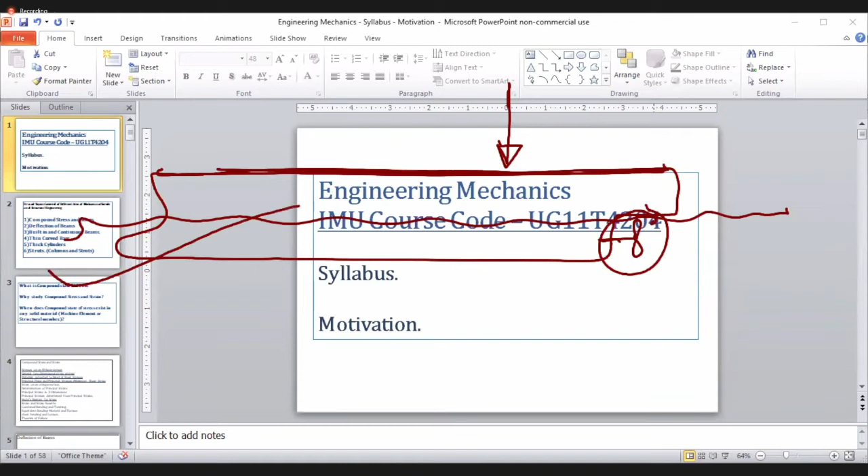And if anything goes wrong over here with the machines, if it is not moving at the right speed, or it is subjected to some kind of rogue waves, then it is your guts, your courage and your knowledge only that will help you in taking action.

Yes, in some very bad situation, maybe a helicopter can come and pick all of you up when the ship is not controllable, or maybe you can jump with a lifeboat and run away. But that rarely happens. Every time, a marine engineer is dealing with a situation which no other engineer on land is experiencing.

Right? Ultimately, ship is moving under the influence of what? We know very well that the ship is acted upon by the force of buoyancy. Then the ship has, suppose, its CG over here, and it has its weight acting over here.

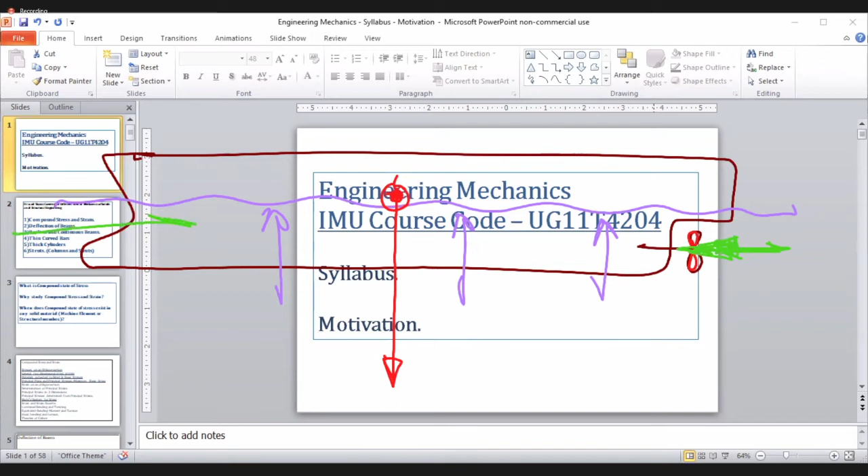This propeller, what does it do, my dear friends? This propeller is pushing the water, and the water in turn is pushing the ship ahead. There is resistance of the water coming from the side. Then there are forces of wind and forces of current also acting upon it.

Then there are forces of waves. What can happen? A wave comes like this. So over here, the ship is under the water for a large extent. Here it is not so. So here there is high buoyancy, and here there is less buoyancy.

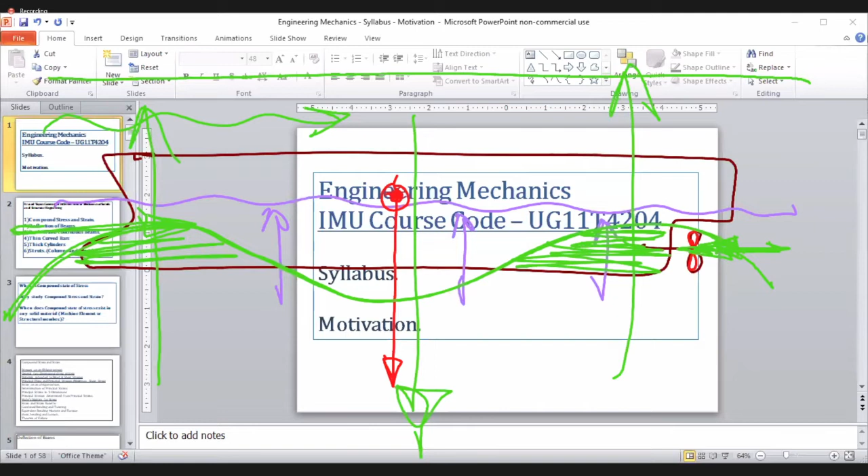Correct? And we are all keeping the ship stable by controlling the influence of all these forces. So how to add the forces? What can be the effect of a force? That anybody should know beyond any doubt, right?

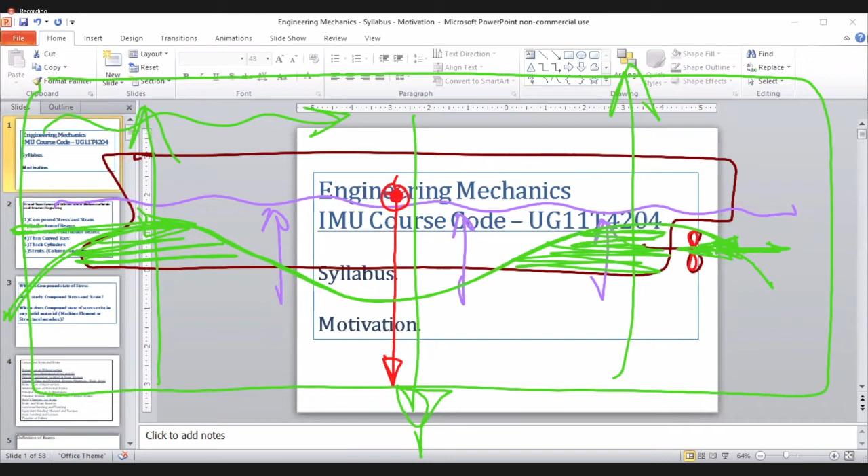This is the job of probably every engineer dealing with machines, be it marine or mechanical, but marine engineers are in a special condition as I explained to you. You will come across a lot of machines in your life.

Excuse me sir, we can't see the picture you are showing. Yes sir, okay, I got it, I will come back here again. Thanks for telling me. Can you see it now? Yes sir. Good, so now you know.

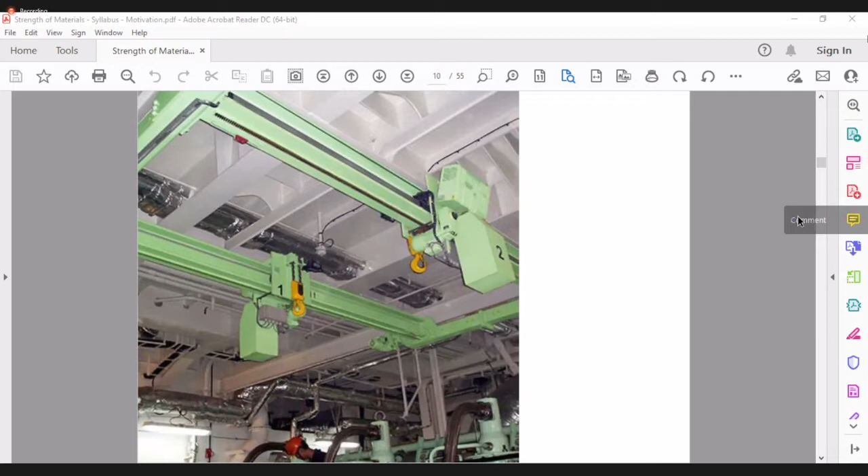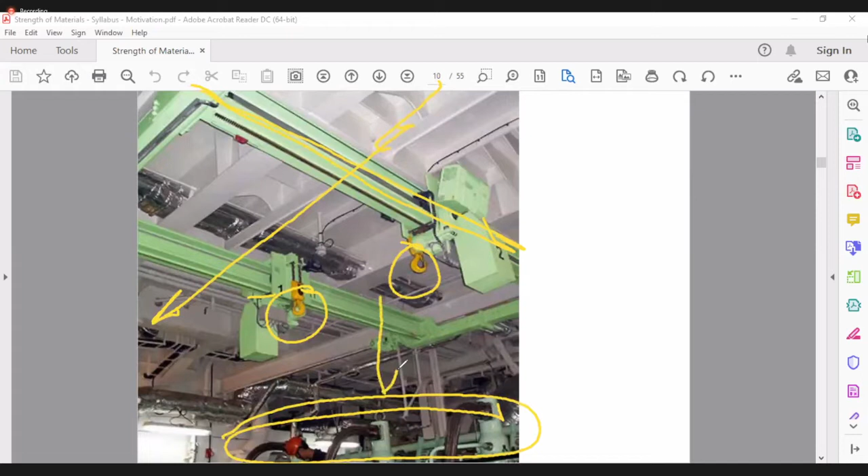This is the top of an engine, which we will see closely later on. And on top of it there are these long slender beams on which you can notice some hooks here. These hooks are required to lift the pistons out. You must have seen the piston of your motorcycle sometimes, if you spend time in the garage.

But here the piston itself weighs about 700 to 1,000 kilograms. A piston can be as tall as you and me. It can have a diameter of about 900 mm to 1 meter. And if it is a hollow cylinder, probably 4 persons like you and me can stand inside. It is such a big cylinder.

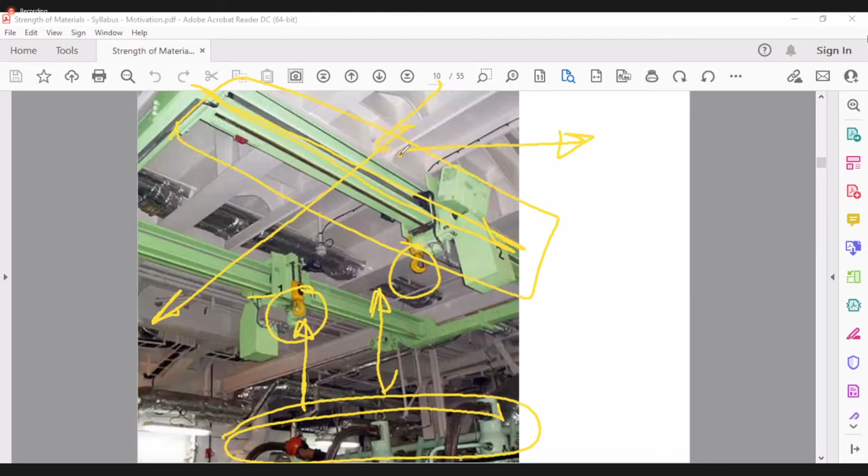So how to remove it? Now, if such a beam is to be operated, then it must be certified what the safe working load is - 3000 kilograms or 300 kilograms. As the case may be, it can be anything.

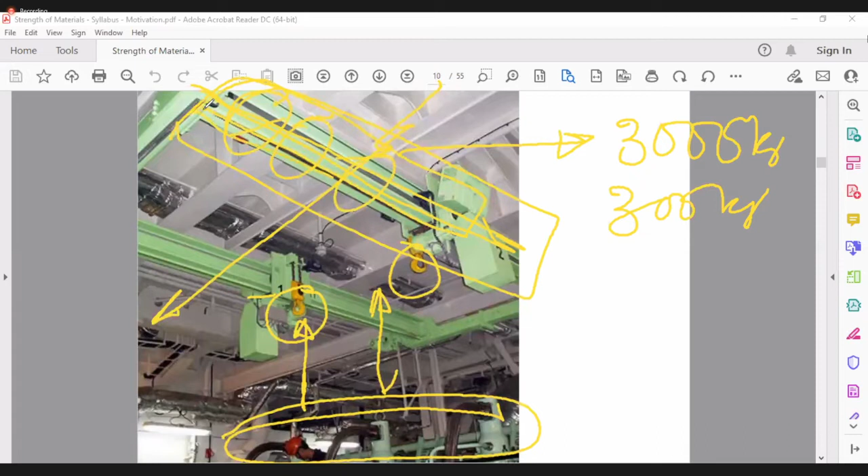So who will decide? How can we calculate such things? How can we select a beam? How strong should this beam be? Or by chance, it's written on the beam that the safe working load is 400, and you want to lift 500 - how will you reinforce it? Such decisions are to be taken. So for that, we should know how to add the forces.

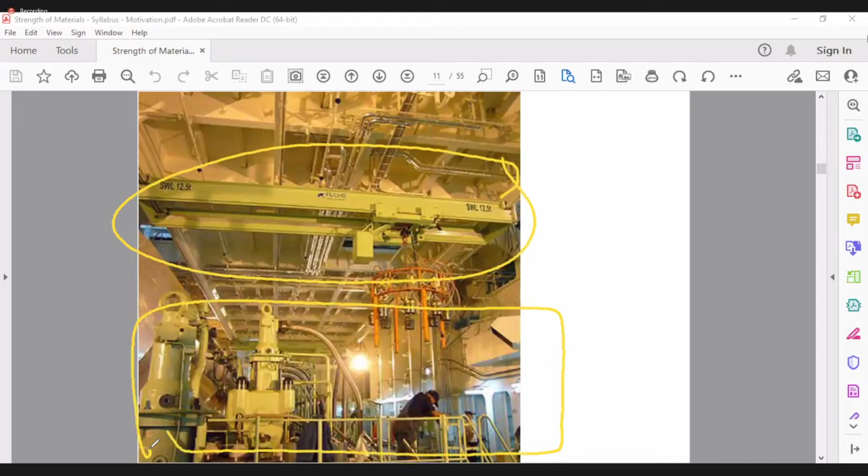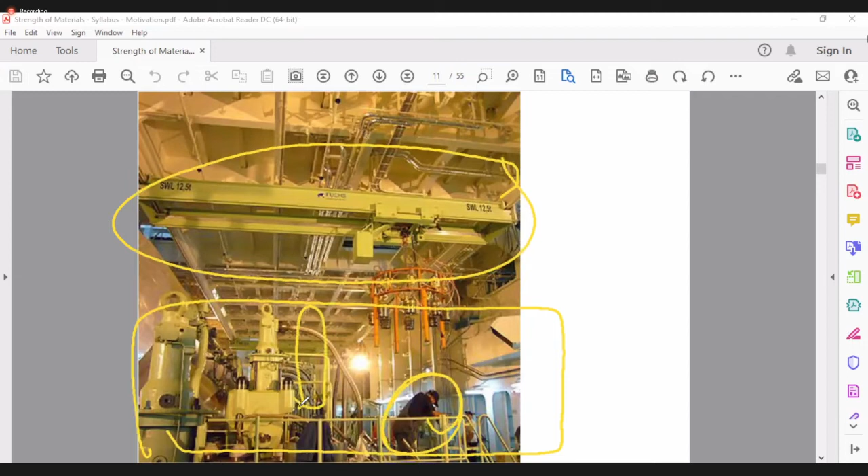Now, again, a quick picture. I don't want to tell you anything further, but here you can see a crane that I was showing you, and this is a gigantic engine. You can see a man standing over here, an engineer. So you have an idea that even the head of the piston is about 5 or 6 feet.

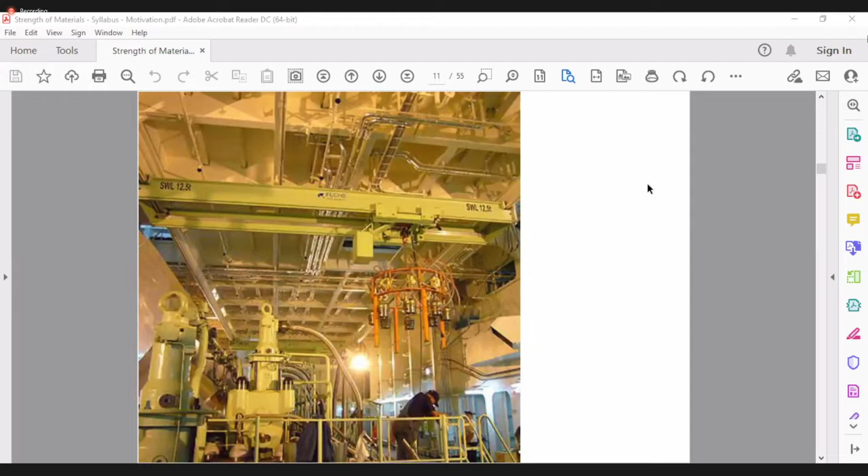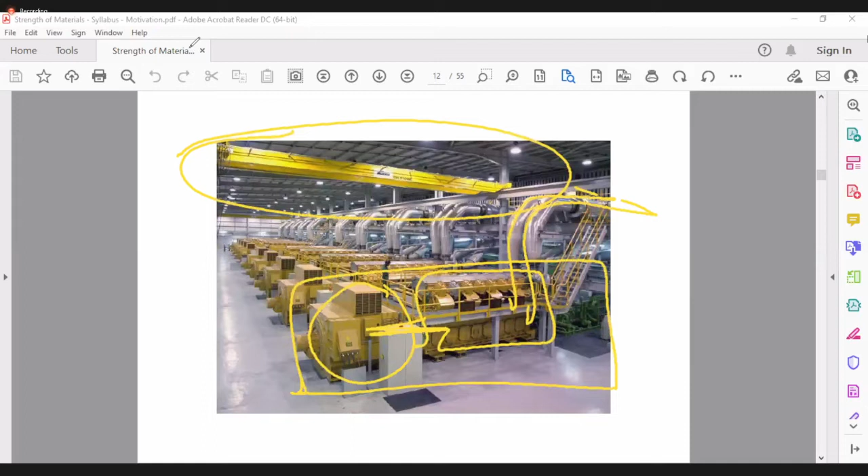On the ship also you will find a DG set looking like this, and to maintain that there is a crane. What kind of a crane should it be, how much should it deflect, what is the dangerous level of its deflection when it lifts the load? All these things are decided with the help of engineering mechanics.

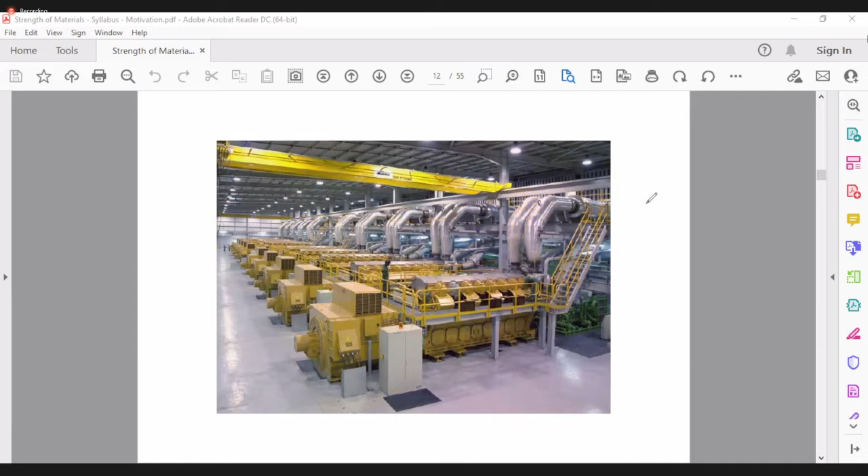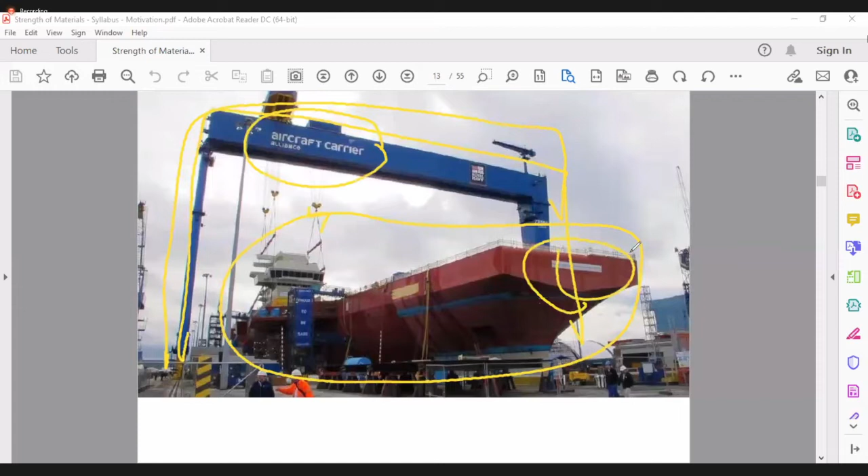This is an aircraft carrier. To build an aircraft carrier, this crane has been made over here. So how strong a crane should be, how strong this beam should be, so that the heaviest plate or heaviest segment of the aircraft carrier can be lifted and put together and welded together. You will be a Lloyd certified welder by the time you leave this institute. It is an achievement, let me tell you.

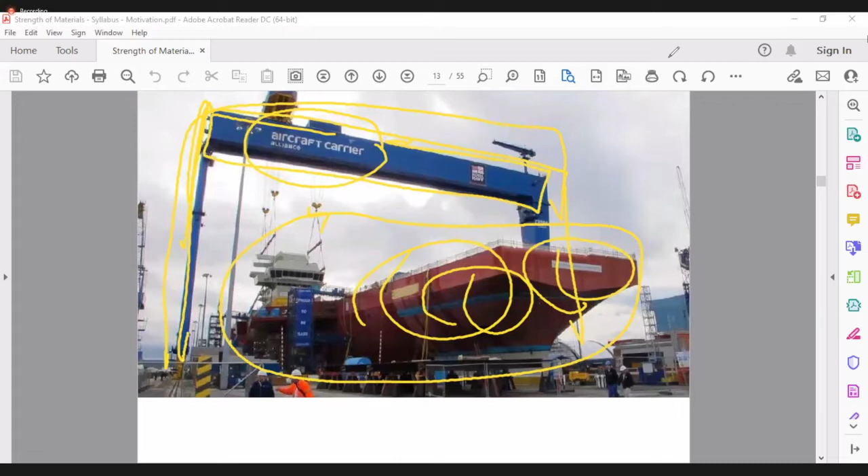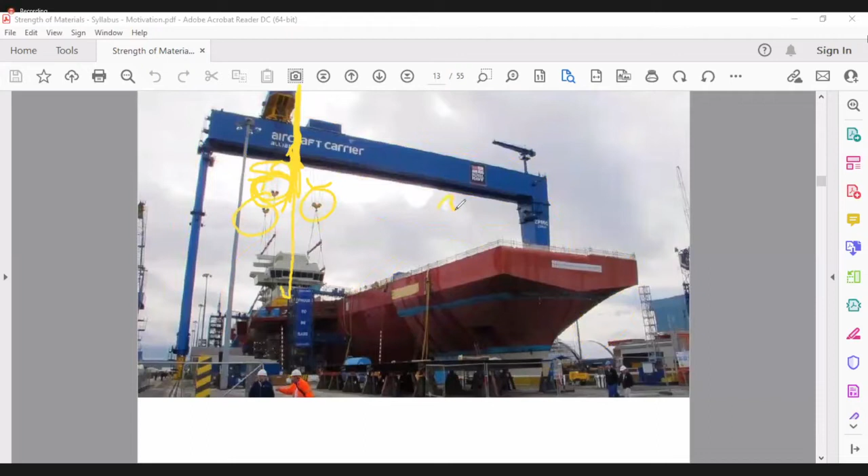You are noticing the 1, 2, 3 kind of hooks. Now all the hooks are nearby, and if you try to lift something, then at one place there can be a very heavy load. So to keep it safe, maybe some hooks should be here, some hooks should be there, so that the load is distributed. All these common sense things in engineering mechanics will become your engineering common sense after some time. You study over here and then you be on the ship for some time, and it will always be in the back of your mind what to do and what not to do.

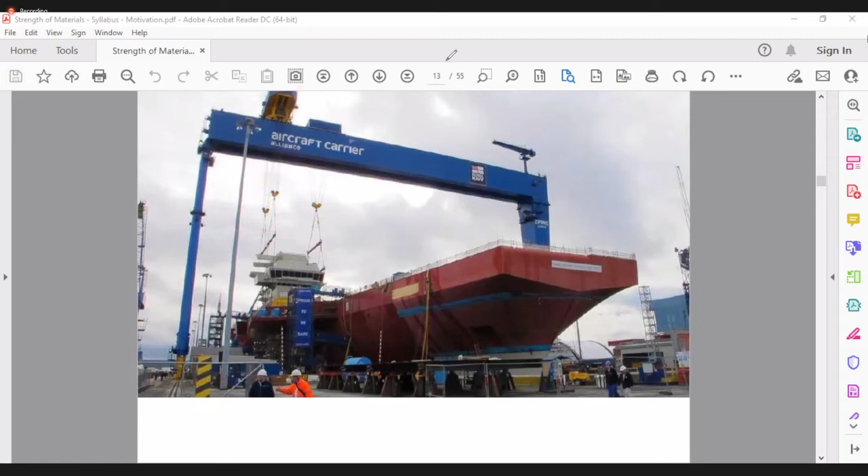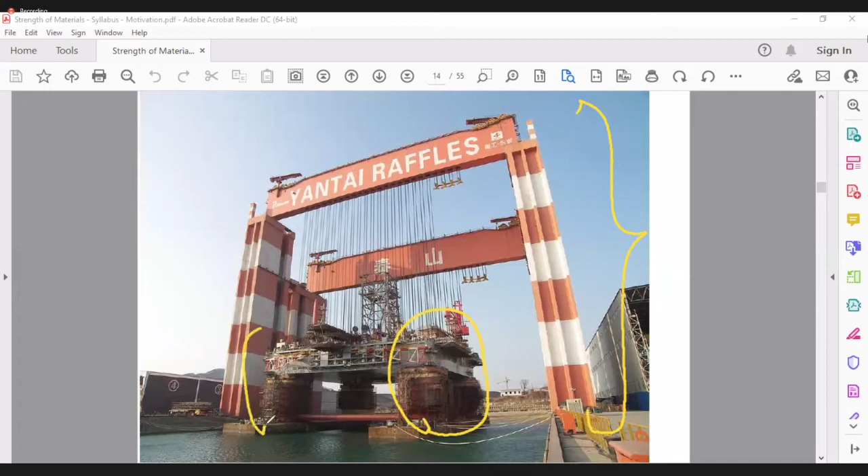And look at the number of ropes. How many of them are required to lift it? Now, the total weight of this rig is known. How many ropes are required? How will you decide? You will decide it using your knowledge of engineering mechanics. Just see the glory of this subject.

You will be applying your knowledge of advanced mathematics, engineering mechanics. Then you will study about materials, which are the strong materials. You will study two courses, one of strength of materials, one of solid mechanics, and two courses of naval architecture, that is how strong the ship should be, and you have one special course on engineering design. Engineering design will tell you what should be the cross section of this column, what should be the height of this particular beam, etc.

So here we are beginning in this course to study everything. I mean, you begin with engineering mechanics, study solid mechanics, study strength of materials, study naval architecture, study system design, engineering system design, marine system design, and then at the end of your 6th semester, you will have a great amount of knowledge. This is just a beginning. It is something like we started studying limits, then differentiation, then integration, the application of differentiation, the application of integration, so we know why it is useful. And now in many courses you are studying thermodynamics also, maybe differentiating things day in and day out, right? So you understood the application of calculus.

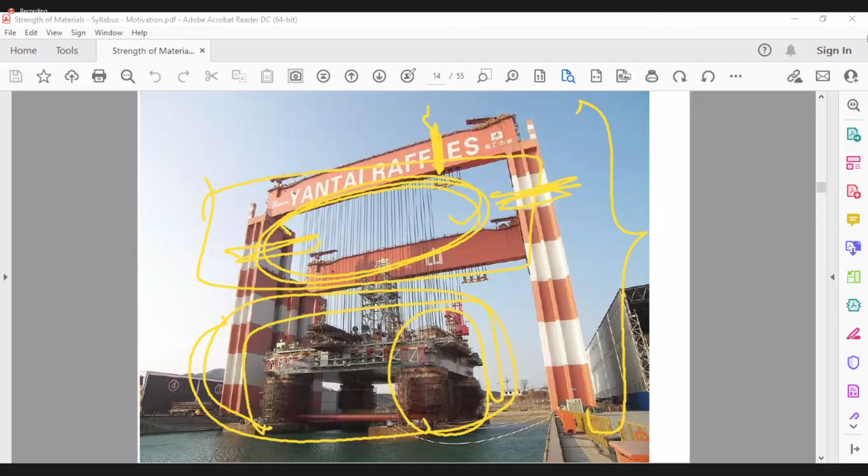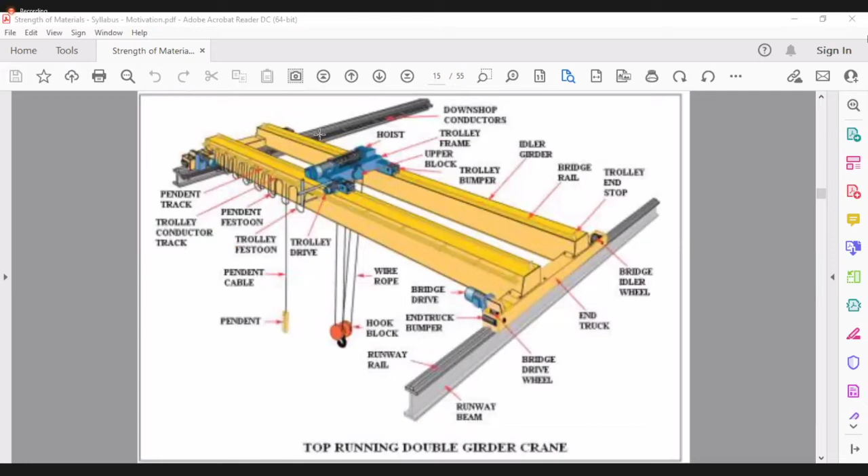This is a very simple slide. Every machine part has a name, and you will have knowledge of designing every part - which part is taking how much load and how strong it should be. You will be learning this eventually.

There was a proverb or saying that money makes the world go round. Today it is an agreed proverb that it is a container that makes the world go round. Container shipping is probably the most busy sector of shipping.

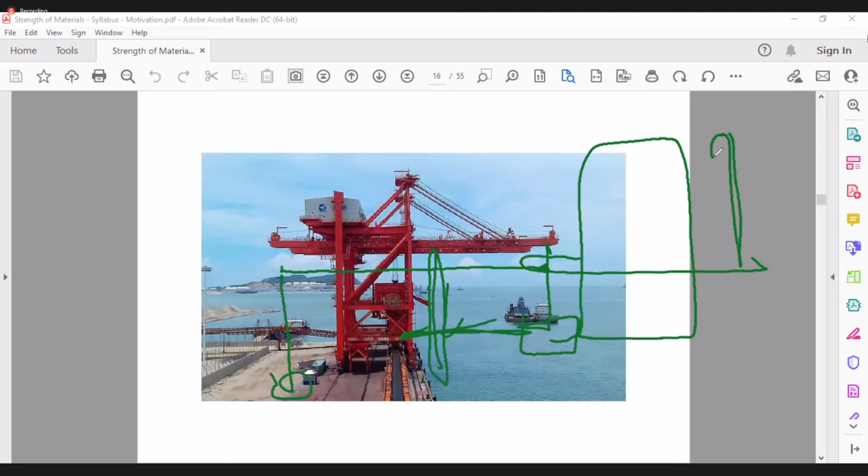This is as high as about the ship outside the water. Container ships are tall - from the water line, they are tall up to about an 8-story building. As a result, this crane should be about 25 meters high.

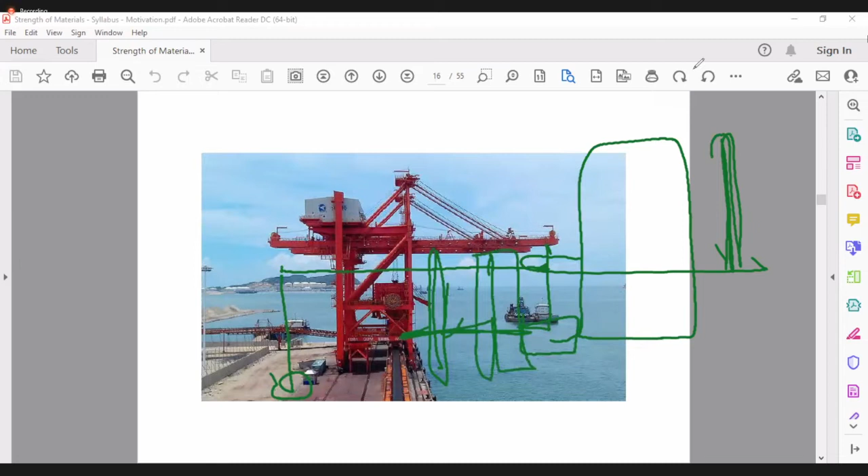When it lifts a 20-ton container from here, how much will this bend? How much does it move as it is taken back? How much pull will be required? What will be the tensions in these ropes? What will be the loads on this carrying column? All these things are decided by the knowledge of engineering mechanics that we will study.

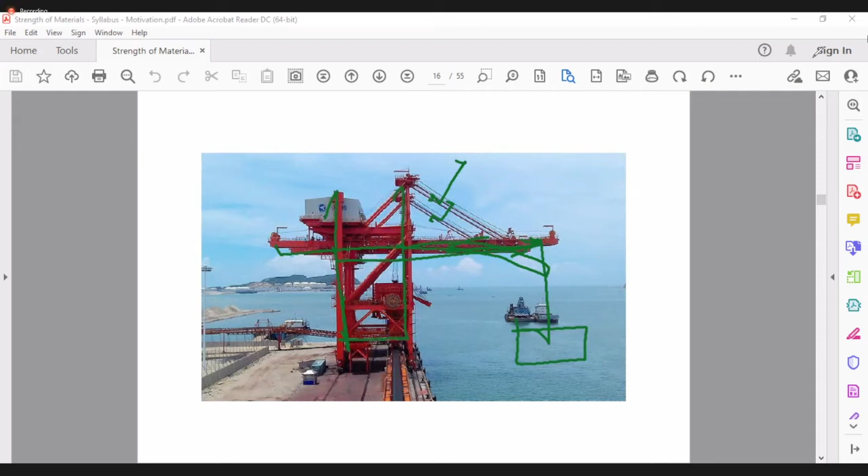So far in 11th standard, 12th standard, and in the last semester, we have studied vectors. We know force is a vector. We know how to add vectors by the IJK method, by the law of parallelogram, etc. That's fine, but how to make use of it in a practical marine engineer's life? This will be taught to you in this semester.

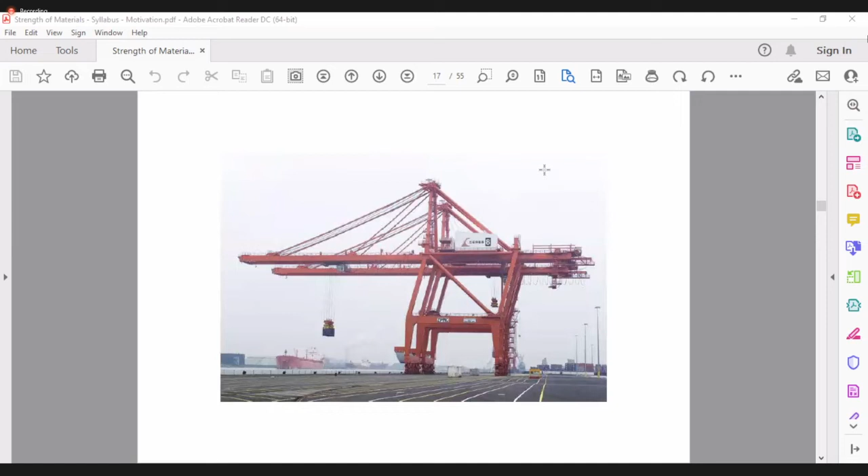Now, this is another crane. This is just a slide to make you conversant with it, well versed with it. It's a different design, that is all.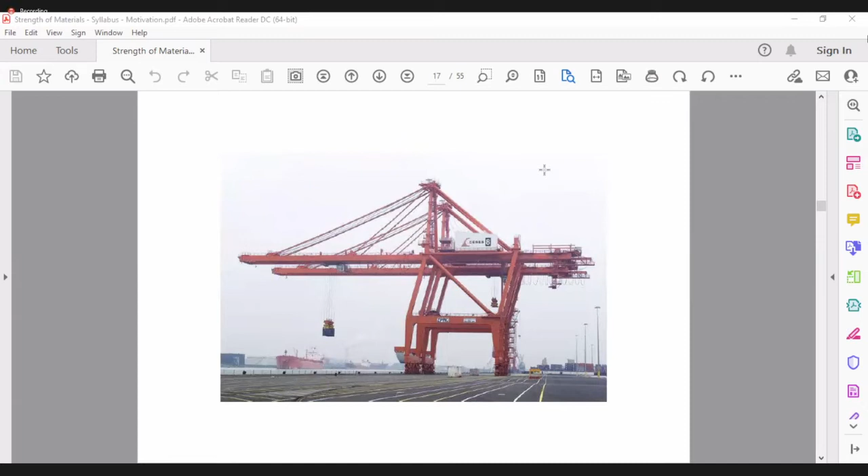Now look at the huge size of a container. This is a container, 40 feet long. This is about 10 feet by 10 feet. It may weigh anywhere between 3-4 to about 20 tons. Look at the pulley blocks, how it is lifted, and maybe it is being pulled out from the ship.

Internet may create some problem, but let us not worry about that. Let us keep working. My internet connection is unstable, it says.

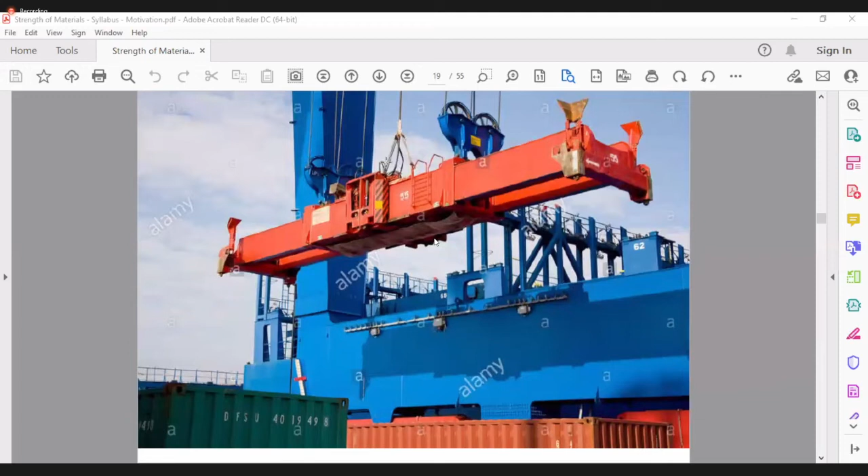Yes, this is a close-up of a thing called a spreader, which is lifting the container.

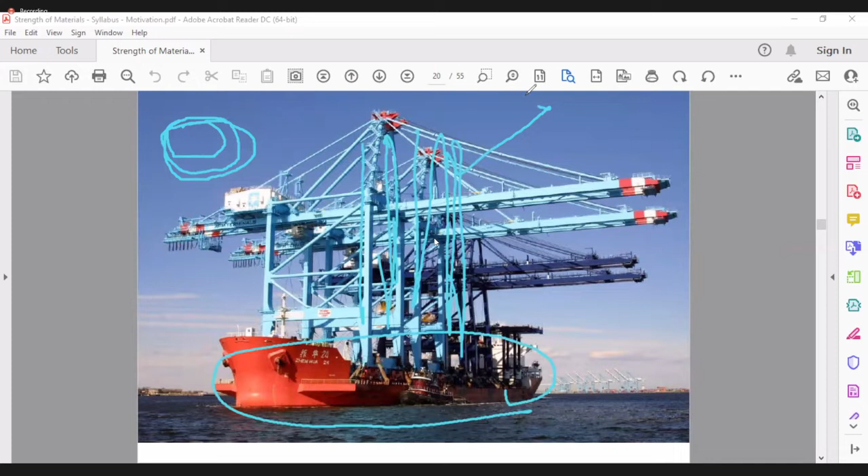These decisions are taken by carefully adding the forces only. So addition of forces is very easy - law of parallelogram of forces, or maybe a vector method using IJK, it is absolutely all right. But this is how you will put it into practice in your life.

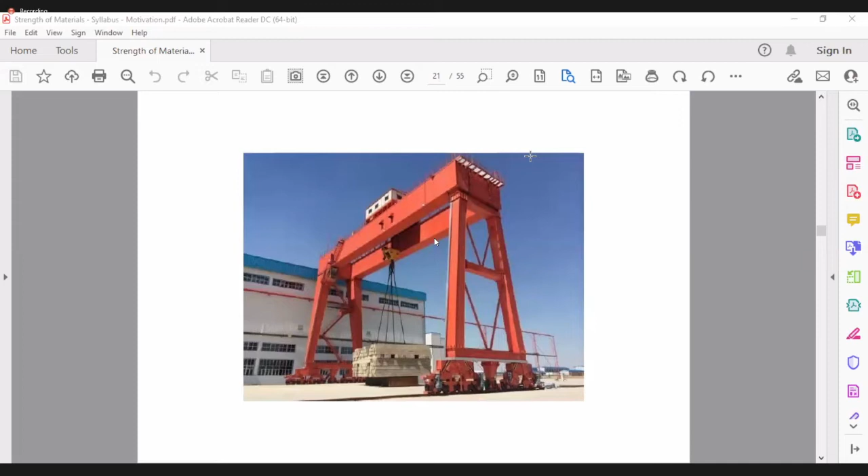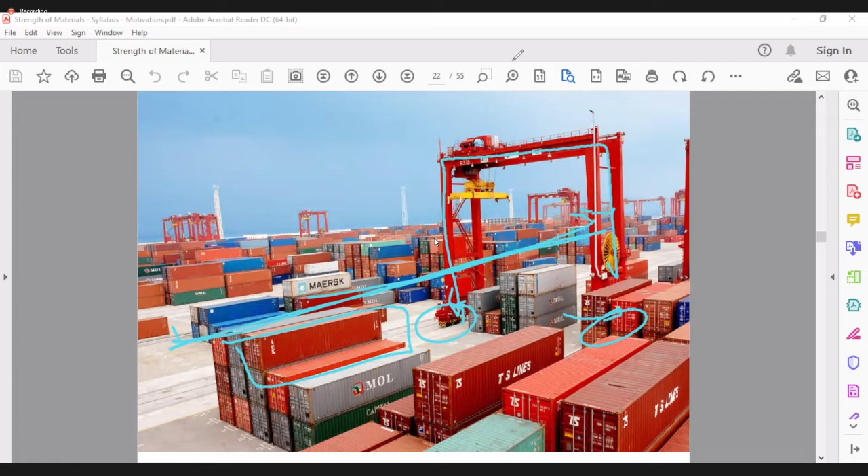Here I am showing this particular thing to you so that you can have a clear idea. Look, this is a container crane, container on a truck. Look at this height. The operator will be sitting somewhere over here, and on the entire port, containers are moved so that they can be pushed to their destination.

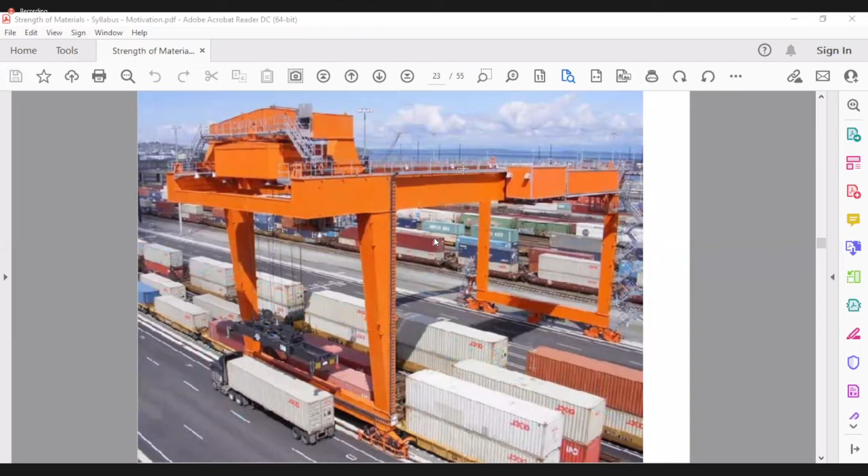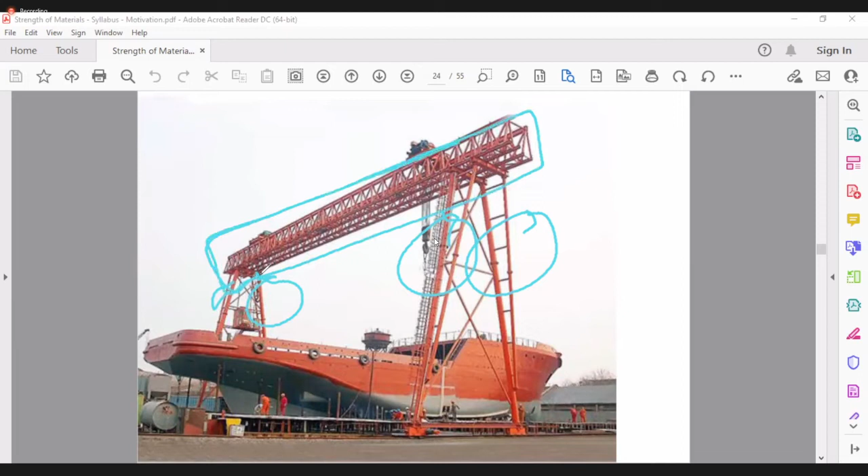Just see, it can lift an entire ship. It's a huge crane. To design the cranes, how strong this leg should be, how this total frame... see, this frame, this total part, it is a truss.

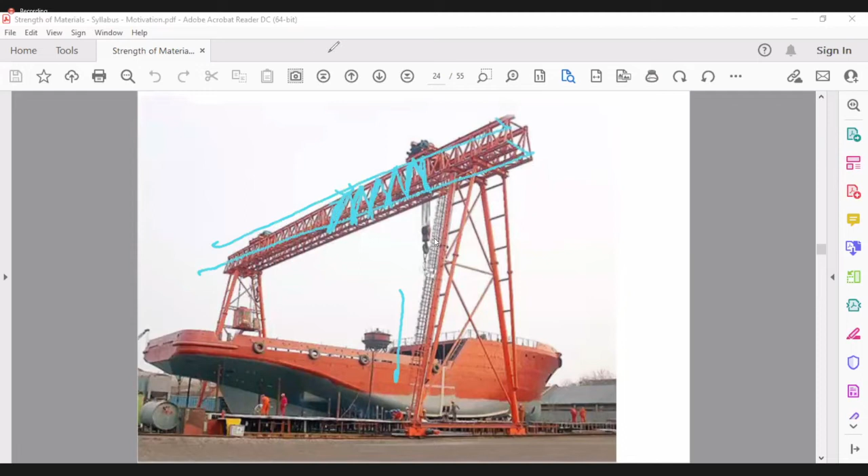In this semester, we will also study how to find the load into each arm, each element. You can see there are iron bars, steel bars which are welded. When load is lifted, how much force of either compression or tension is coming into this bottom element, top element, this sidewise elements - this we will study in detail and find out.

Probably you can design such cranes at the end of this semester, or you can at least estimate the size of a steel, or how strong the pipes or a section should be. You will know very well.

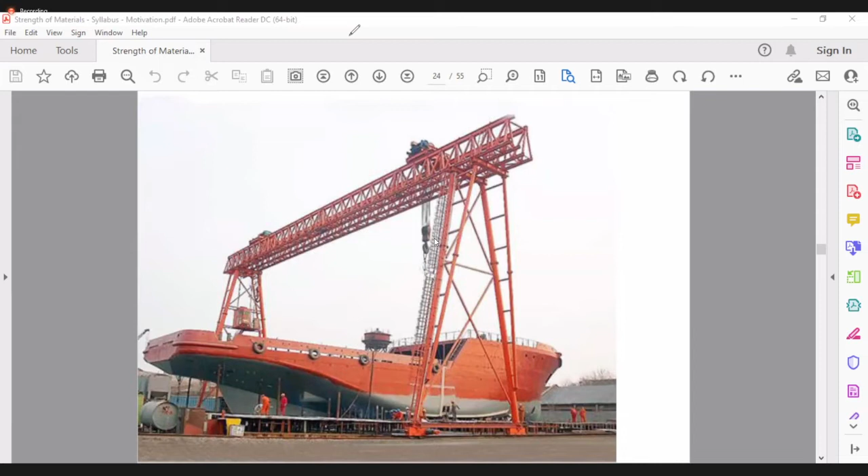This is the largest crane in the world. The distance between the two, this must be about 80 to 100 meters. The crane itself is weighing 4,000 tons, that is 4 into 10 raised to 6 kilogram.

Now, this is a shipyard and it is used there. This crane is so gigantic that there is a small toy crane on top of it. This toy crane also should be at least 3-story high.

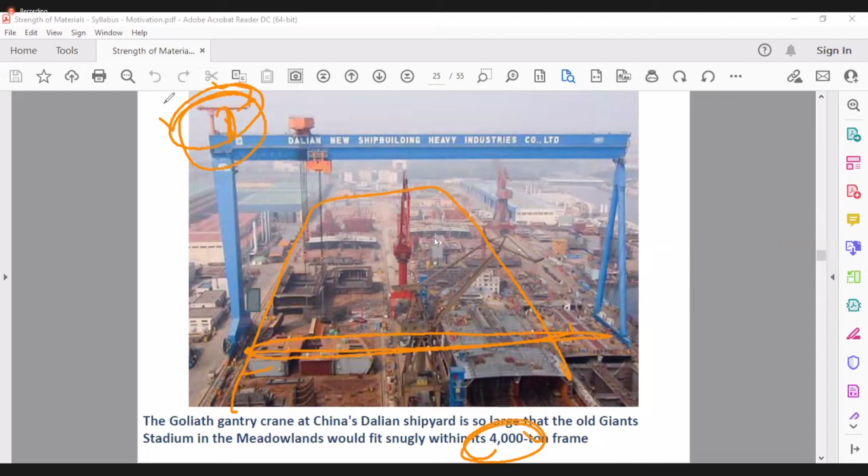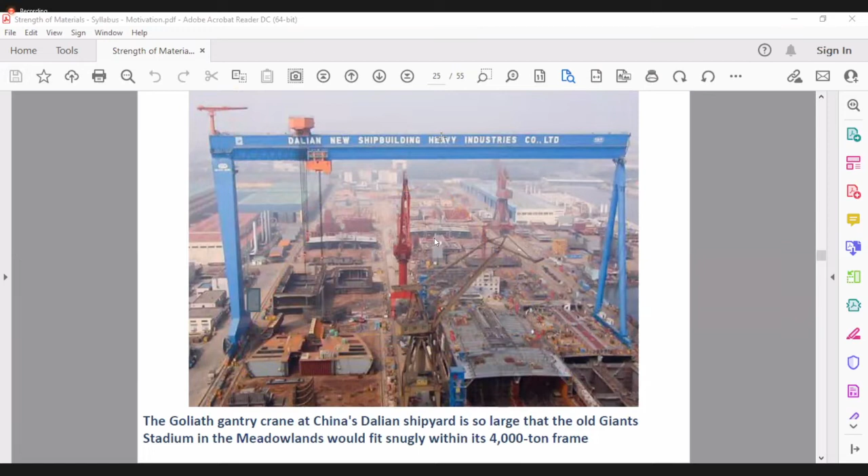If you go to your hostel terrace or take a look at the mountain outside our institute, on the mountain they are building a temple and there is a crane like this. So adding the different forces is a day in and day out job.

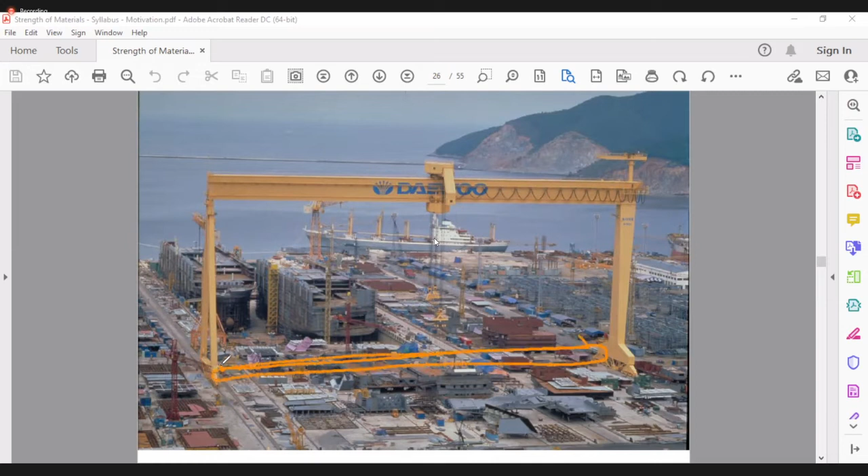This is again an equally big crane, but in a different company. Here also this distance is about 80 meters. It is a mind-boggling thing. Such huge structures are very rare.

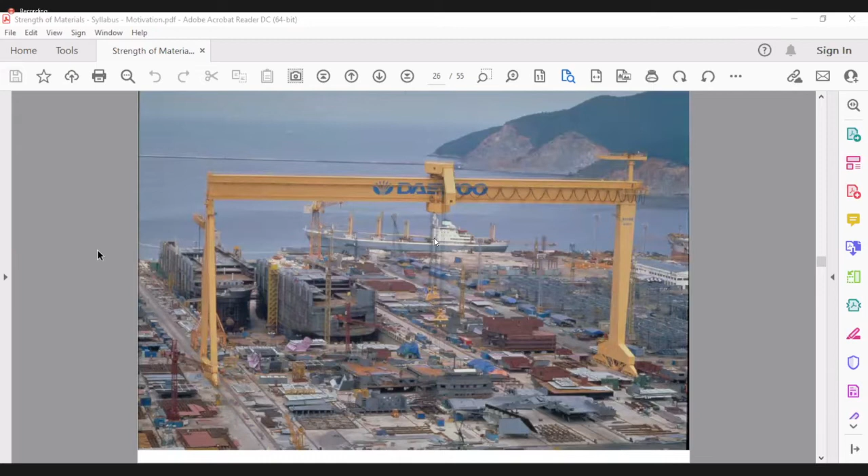Now look, here a part of a ship is lifted. How to lift it, etc., is being done with the help of addition of forces.

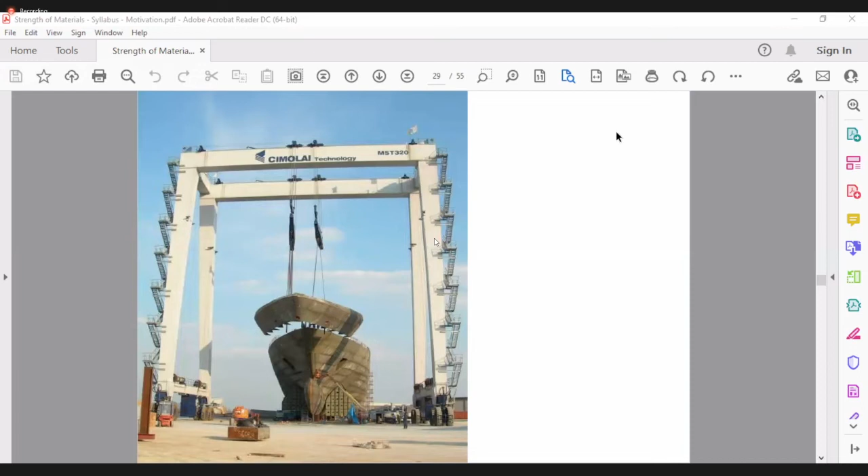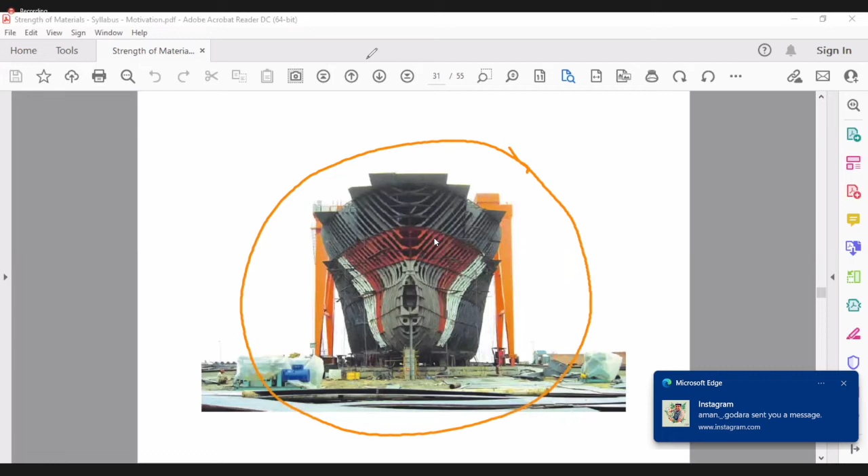And they tried to lift the load. What resulted in the miscalculation? They could not predict the summation or effect of the number of forces that were acting. Yes, sometimes it can happen. I don't say that it was a human mistake only - maybe a typhoon came and the wind load became so high that it just could not withstand it.

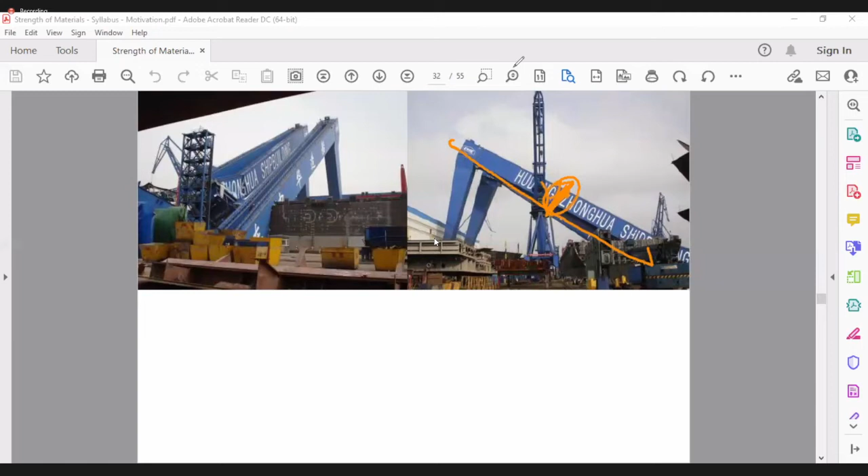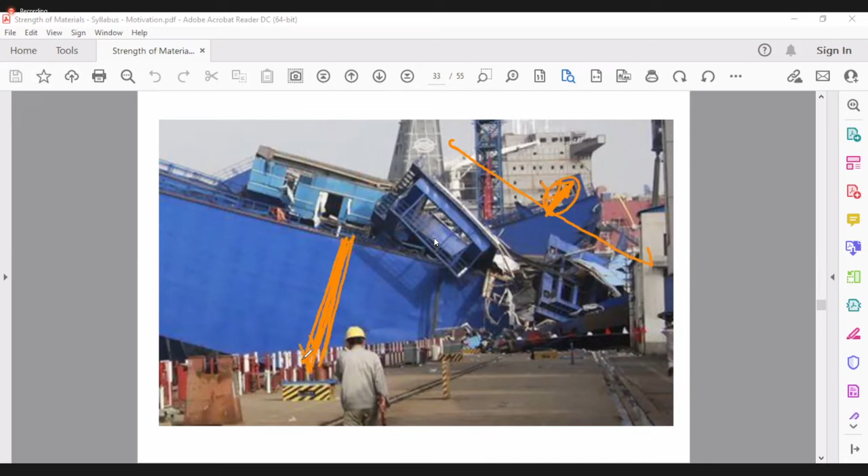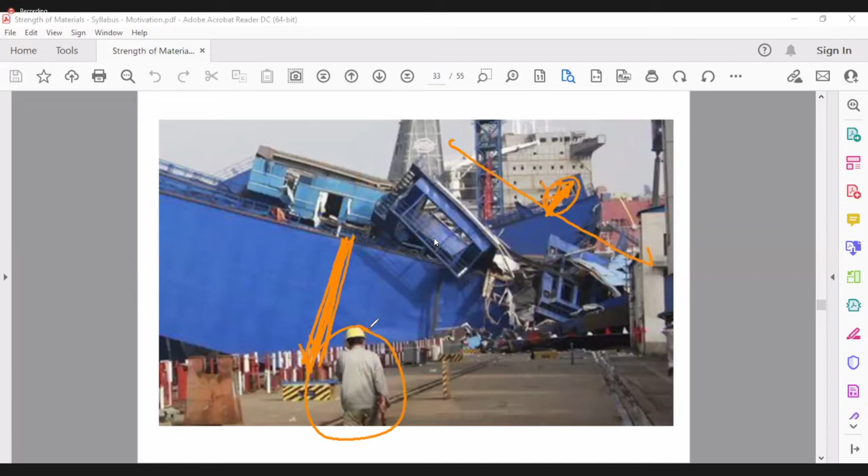But you can see that section is so big. This must be at least 5 meters. 5 meters means - you can have some idea how much expensive it should be, and how it has collapsed like a toy.

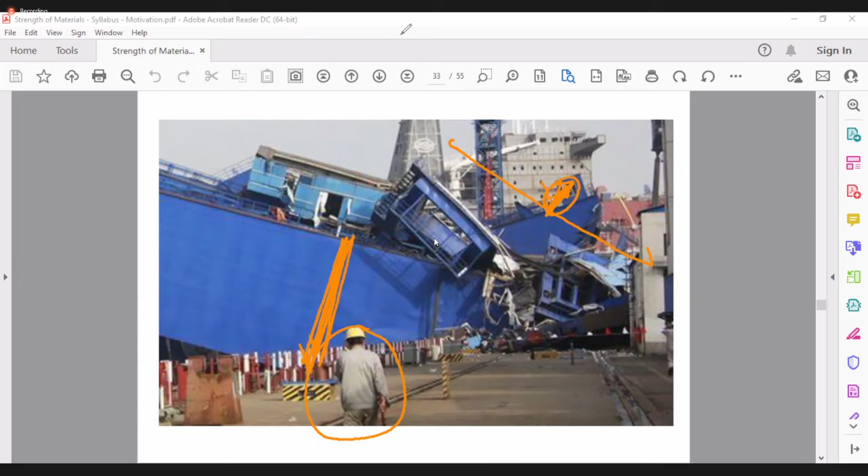Why? Because forces that acted upon it just deformed the structure. The structure was not designed to withstand this much force.

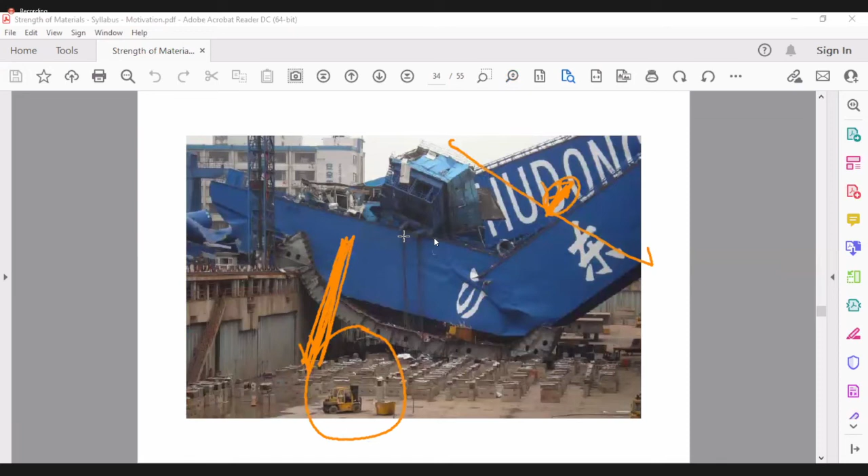Another view, here you can see - look, here there is a small weightlifting truck, material handling thing. So how big is this? What a great crane it was, and it collapsed. It must have resulted in a very big loss to whomsoever it belonged.

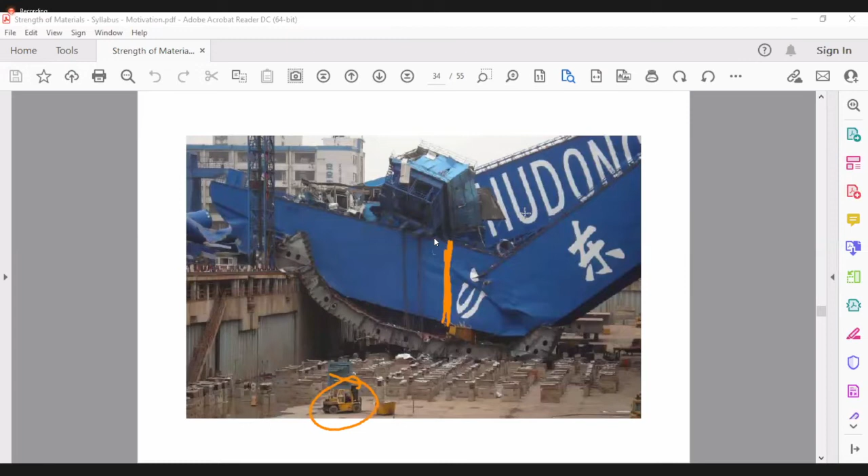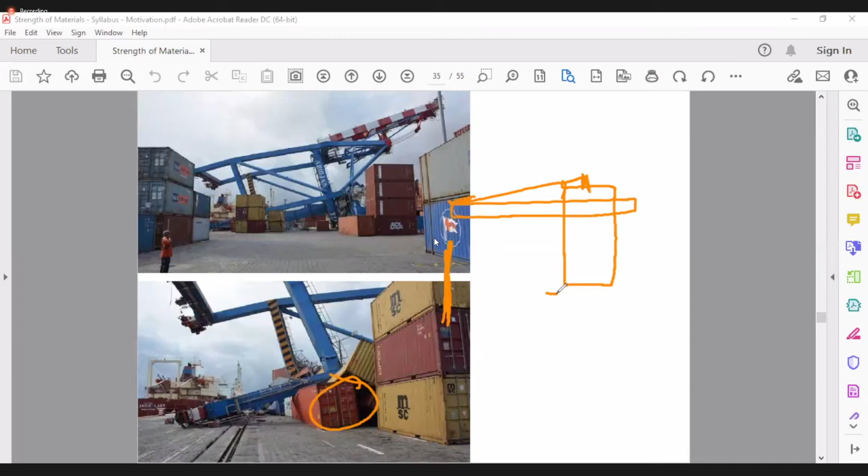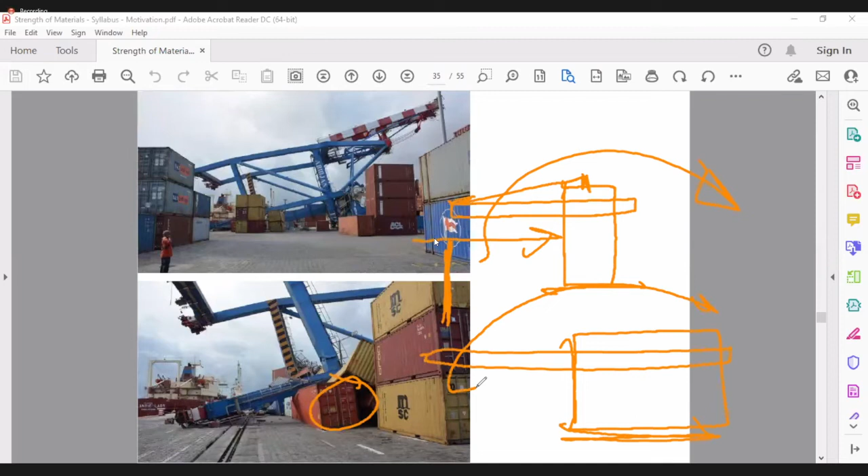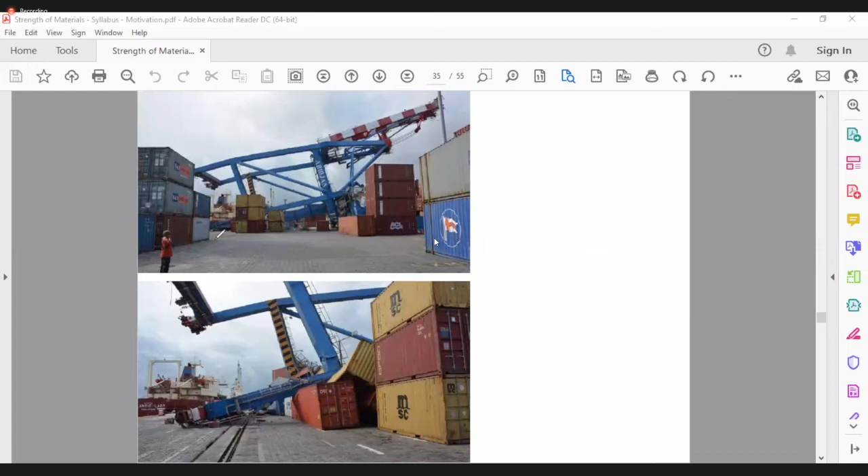You can clearly see here that a heavy gust of wind has pushed the whole crane back. Now, how not to allow it? Maybe the crane was like this on the ground - the wind came from here and just pushed it back. Maybe next time, if you make a bigger base over here, then it may withstand the wind. Such design decisions are taken by people who can add the forces and moments, etc., day in and day out.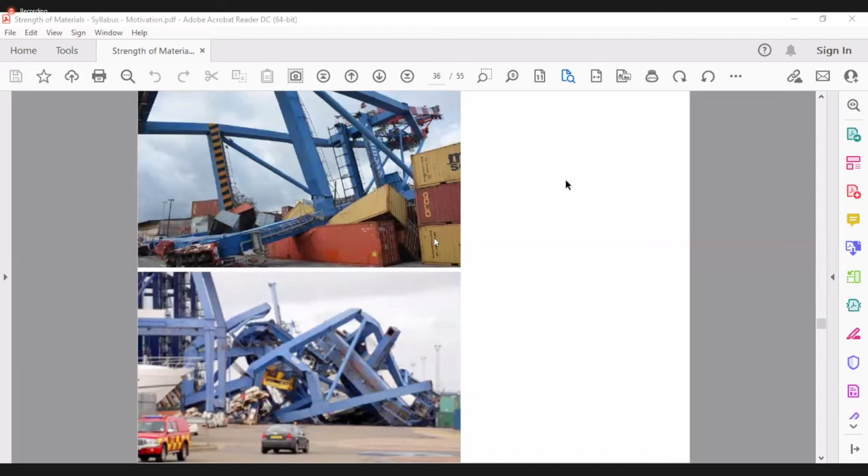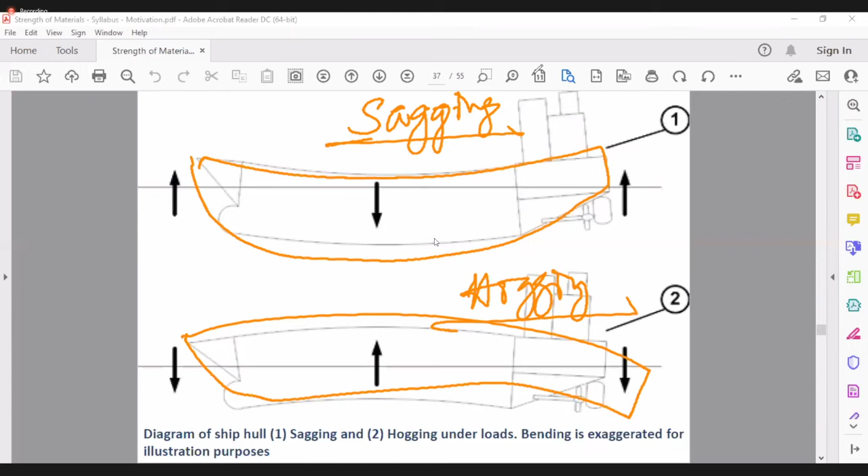And this is hogging, right? Sagging and hogging. Why it happens, we will see this.

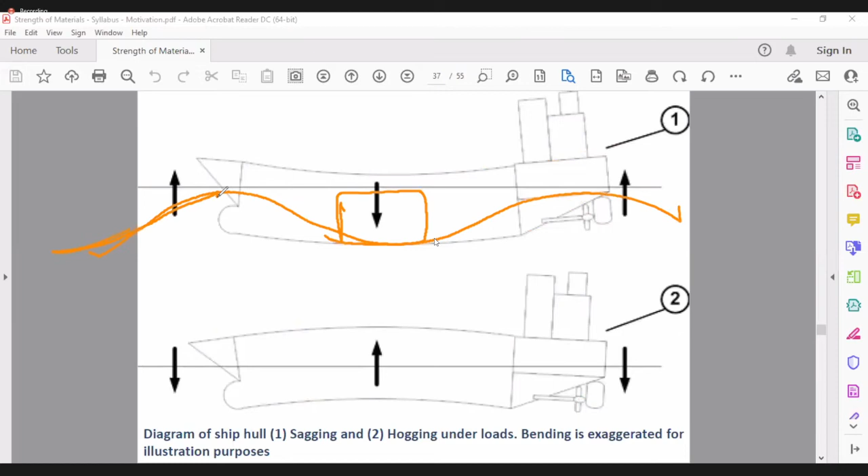In this case, it may so happen that there is more cargo in the center and there is a wave like this. So here buoyancy force is higher, here buoyancy force is higher, and here there is a weight. So it bent like this.

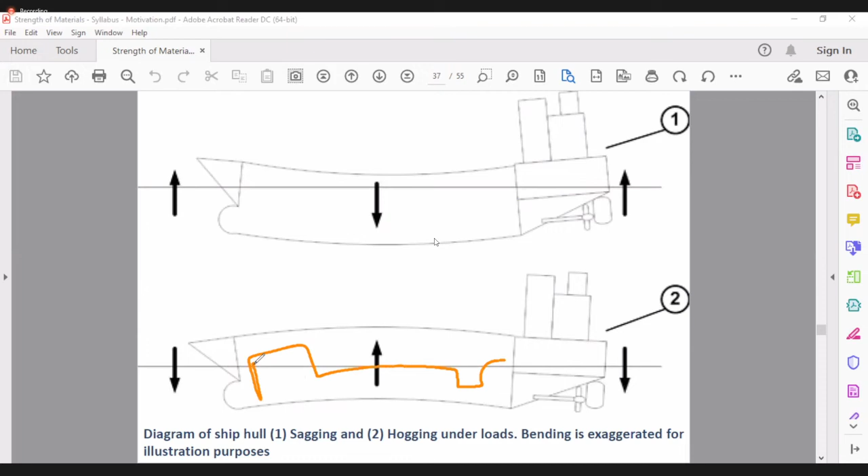Here, reverse the case. Maybe the cargo was more over here, less in the center, and again more in the rear side, and a wave came like this, giving a higher buoyancy force over here. Correct?

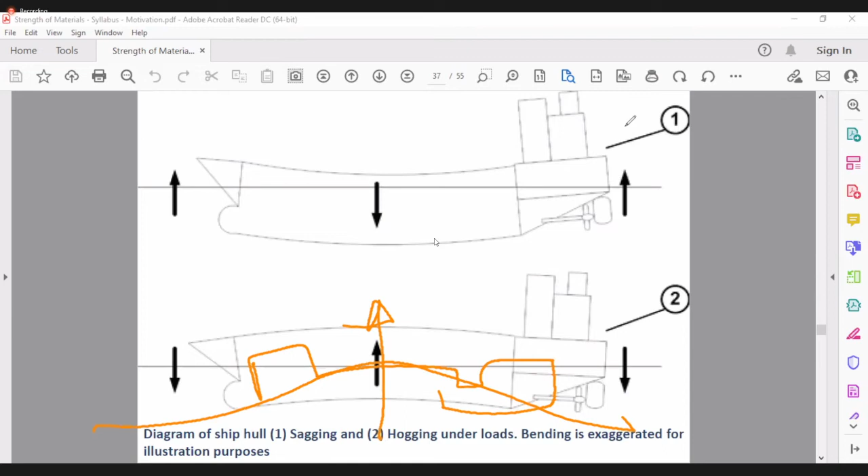Now, ships are designed to withstand such things. They are made stronger to function properly in a certain adverse condition. But if addition of force results into something...

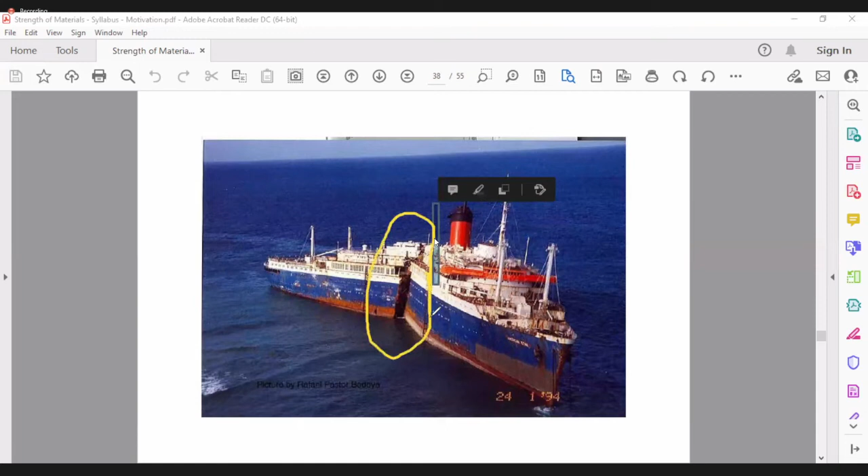In the history of shipping, such kind of failures have occurred more than you know. At least just go and see on Google, you will find ships broken like this, probably every decade. And this has happened in 1994.

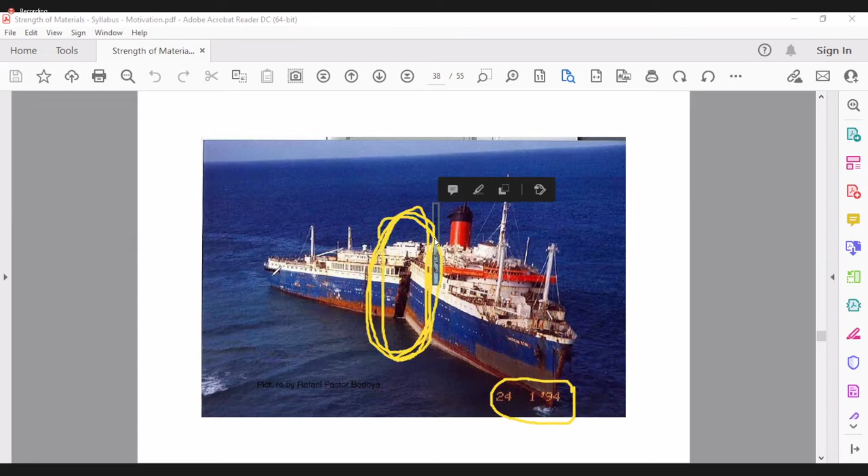Now, 1994 is not a very bad days where we didn't know the technology. Computers were there already. Man had gone to the moon and come back. We had all the technology available. But even then, we could not predict how much stronger a ship should be to withstand certain forces of the wave, wind, and load.

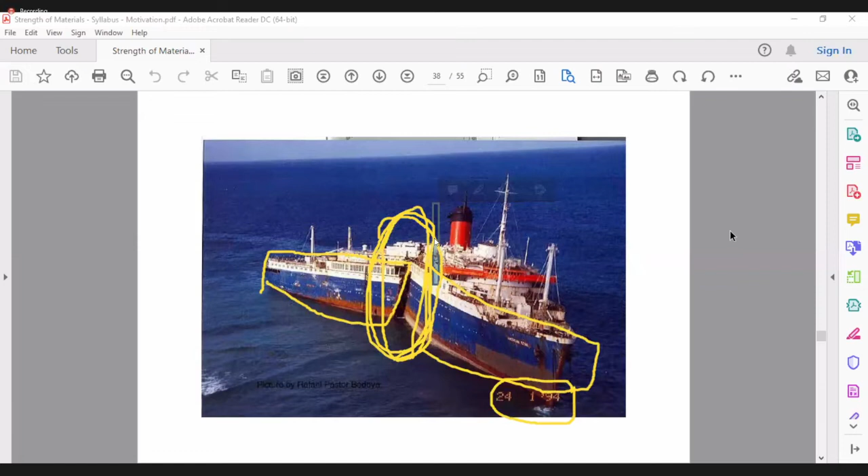So, ability to accurately treat the forces and predict how they will act and what will be the deformation of a material, that is a must knowledge for every marine engineer. This is a close-up of it.

Another ship. Just see what kind of a thing it is. Dear friends, I just want all of you to understand that what we are going to study in this course is something very serious, very interesting, and very necessary for all of us.

As I teach you, I also keep knowing something more and more about it. So, I'm sure some of you, there are two divisions, there are 70 cadets all put together maybe. Out of 70, I'm sure about 10 to 15 cadets will in future be designing the ships. They will become naval architects. They will sail for some time and they will take a land job. They would like it and they will continue with it. They will be required to study something further advanced, which I cannot predict now.

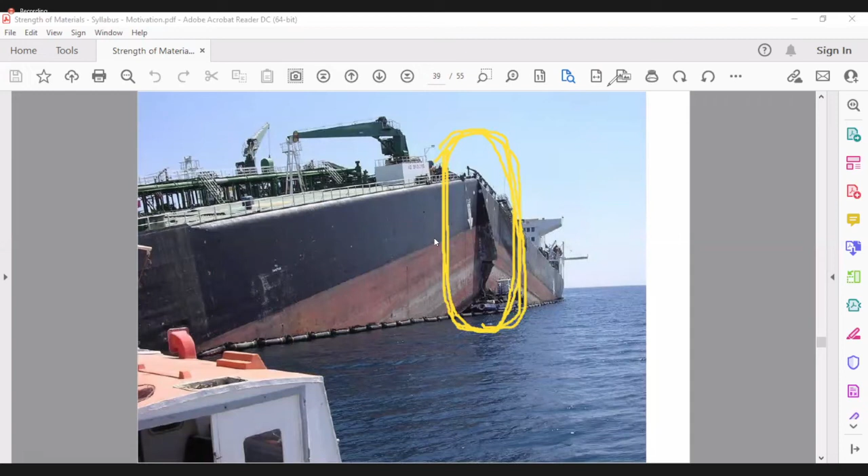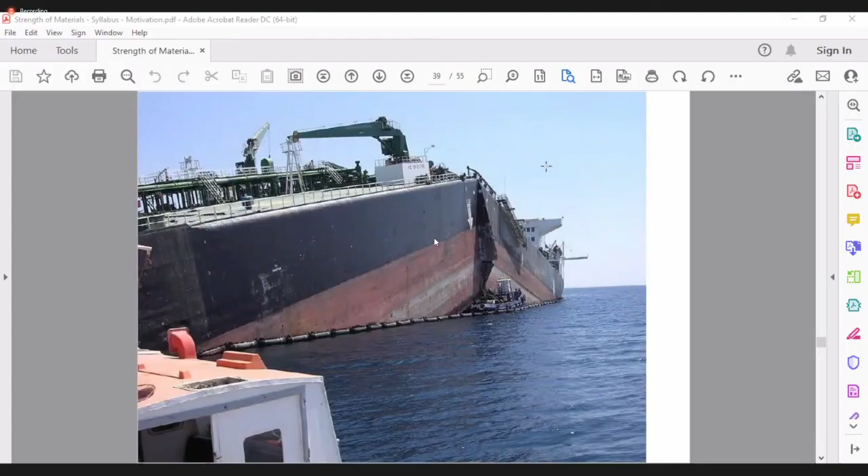Again the crack. Look at this. This is an oil carrier. Can you imagine? This whole length must be 200 meters.

Are you staying in a campus? Who is staying in a campus in this? So division 1, 2, 3. So division 2 is staying in a... 200 meters means the length of your entire hostel number 3. You have seen hostel 3. So it is 200 meters. Sir.

Can you imagine a steel hostel 3 made up of steel can break like this? Probably hostel 3 is smaller than 200 meters, I'm not sure. But just see the calamity. Why? Because this ship was subjected to the forces which it is not supposed to take.

Now, it can happen because of a lot of other things. When ships are just made and when they are virgin, they are fresh and there's no corrosion, etc. Later on, it may get corroded because of the use, etc. And it still becomes weaker in a section than it was designed to. And gradually, its load carrying capacity decreases.

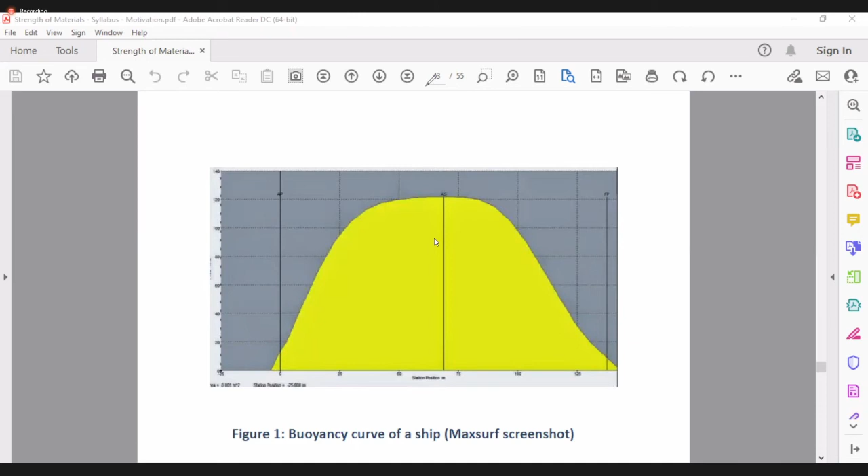How to distribute the containers on the ship so that the CG remains at one place? This job also needs the skill of adding forces only ultimately. Each container everywhere has a certain weight which is certified, and each CG is being pulled down by gravity. Where is the resultant of all these forces acting? That should be known. Nowadays there are computer softwares to do it, but you should have some idea how the software works and on what principle they are working.

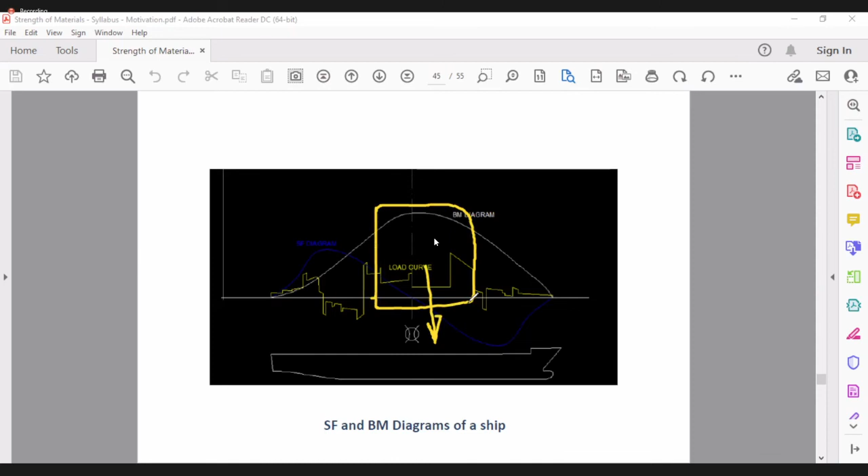This ship broke into two parts and both the parts were floating. We are studying engineering mechanics because we know what can happen by the rogue forces. Here it is clearly shown how there is a high buoyancy force and a load also acting downward in this place. These are shear force and bending moment diagrams of a ship. This I will teach you in the next semester.

Sum of all, now how does the ship behave? This is the reason, dear friends, that we have been studying, we will be studying rather, engineering mechanics. I hope you really feel motivated to study this.

Piyush, what do you say, 8143? Piyush? Piyush is busy, he is a very smart cadet, he doesn't want to be in the class. Sir, I'm there, sir. Then why don't you reply? You're so shy. No sir, I was actually bringing the mouse to the unmute button. Shivam, what is your opinion, 8176? Yes, sir.

So did you really have some idea why we are studying engineering mechanics now? Yes sir, there are a lot of reasons more than this, but this is equally important. Prathamesh, 8078. Sir, he is sleeping, he is sleeping. No, sometimes people, no sir. No sir, I am awake. You are awake, good, Prathamesh Jadhav is awake, I can see that.